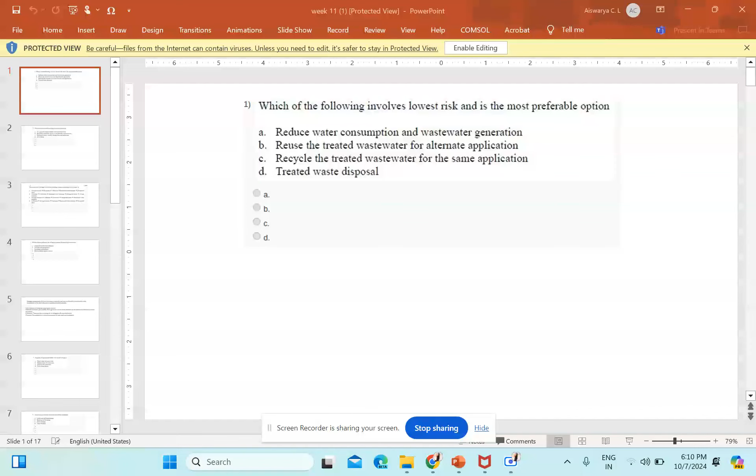Okay, we'll start this week, week 11. So these are mostly theoretical questions.

First question: which of the following involves lowest risk and is most preferable option? Four options are given: reduce water consumption and wastewater generation, reuse the treated wastewater for alternate application, recycle the treated wastewater for the same application, or treated waste disposal. So which involves lowest risk and is the most preferable option?

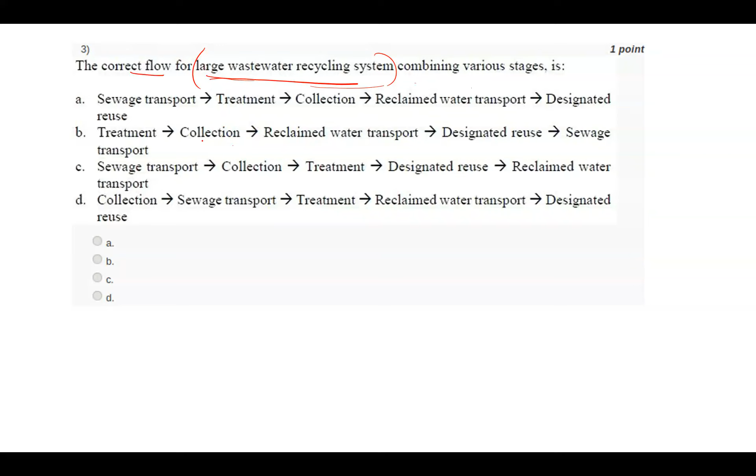Then, the correct flow for a large wastewater recycling system combining various stages - you should arrange: sewage transport, treatment, collection, reclaimed water transport, designated reuse. These are all there, then you have to arrange it according to the flow, from initial to final.

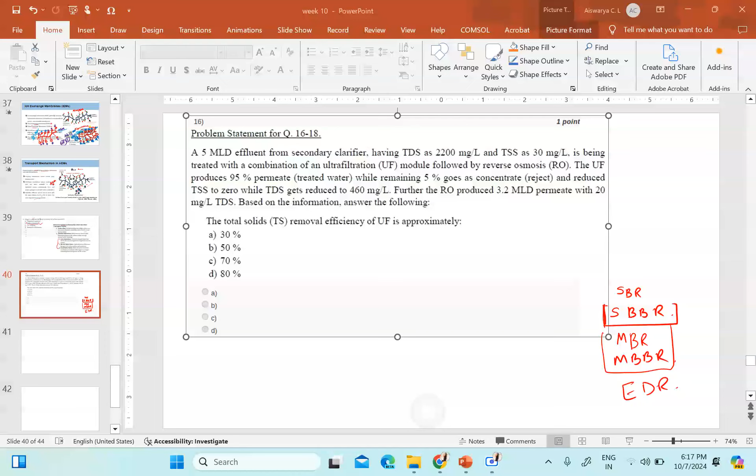So first, collection - you have to collect the wastewater from different sectors where the generation of wastewater is occurring. Then the sewage is transported to the treatment plant where it is treated. Then the treatment is happening. Then the reclaimed treated water is again transported to the designated reuse. Okay, this is the right answer - D is the right answer.

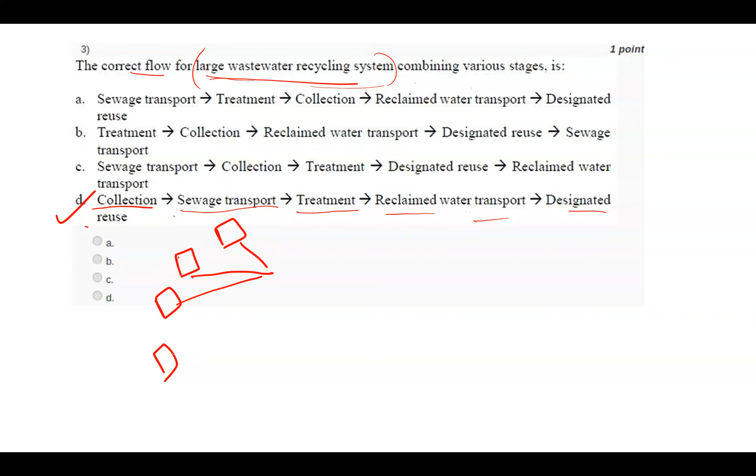First collection - that wastewater is generated even from home. If we say this is home, then we collect it, then it is transported to a treatment facility. Then the treatment facility processes it, and the treated water is sent back again. Then also the concentrated one will be there - if it's not zero liquid discharge, there should be a quantity of concentrated brine.

So anyone has comment on what is ZLD, NZLD? This is near zero liquid discharge, and this is zero liquid discharge. In zero liquid discharge, we have a waste stream, and we completely separate water and solids. This is pure water and this is solid.

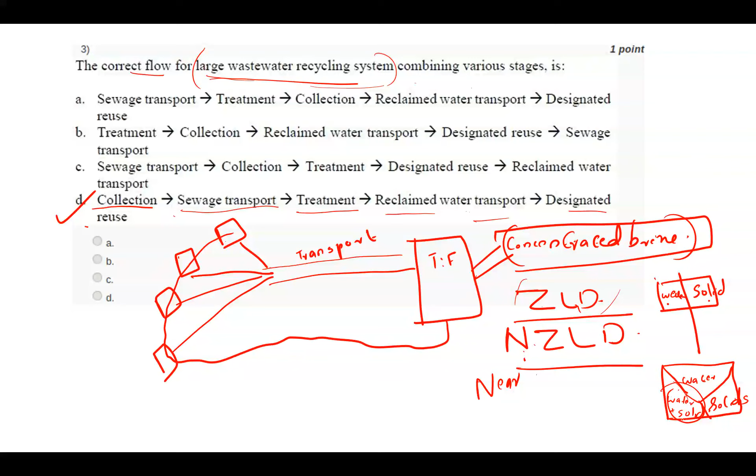So in near zero liquid discharge, what happens? We may produce three streams: water, then solids, some minerals that we have separated. Then we also have a stream, some minimal stream where water plus solids will be present, and this quantity will be minimum. We have approached zero liquid discharge, but still there is some quantity of concentrated brine produced. That is near zero liquid discharge.

Next question. Which of these pollutants are of major concerns for recycling wastewater? When we recycle wastewater, which one of the pollutants is a major concern? A. Suspended solids. B. Nitrogen and phosphorus. C. Emerging contaminants. D. Biodegradable organic matters.

Any answer? Any idea? Which is the major concern when we consider all these four options? No ideas? Which one?

Yes, right, option C is the right answer. Emerging contaminants. Why is this a major concern? Emerging contaminants are chemicals or materials that may be a threat to human health or environment, for which there are no published standards.

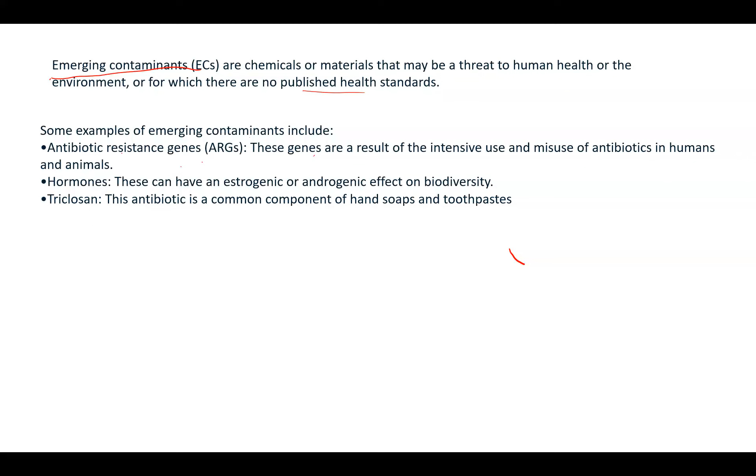Next question. Irrigation of agricultural fields with treated sewage: is it direct use of wastewater, indirect use of wastewater, disposal of wastewater, or none of the above?

Yes, A only, I said like use, I guess it's reuse. It's the right answer, direct reuse of wastewater. So what we are doing is wastewater is collected and treated, and if the chemical content inside is fine with the agricultural field, for different crops different standards apply, for some crops salinity is fine, for some the salinity should be very low for them to grow. According to those standards, if our treated wastewater meets them, then we can use it for irrigation. This is called direct reuse of wastewater, after treating the sewage.

Disposal is not right, because disposing means we are not treating, just putting it. Indirect reuse is also not correct, since we are directly treating and putting the same water for irrigation.

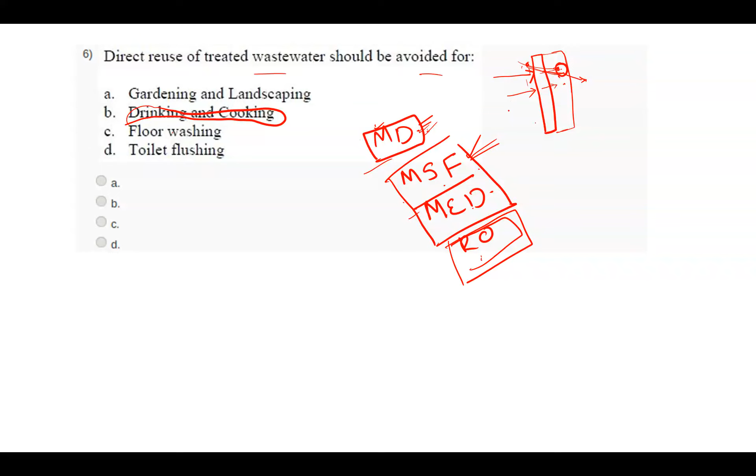So this treated wastewater we can just use in, I think, some schools also have started - not very dirty water, but some minimally treated water they are using for toilet flushing.

And even floor washing also, we should have certain water which is safe for even floor washing. Otherwise that will also get damaged, or if some bacteria and viruses are there, then dangerous bacteria, if used for floor washing, and if we have small kids, that will come on them and can be a problem. So it's complicated, but it should not be taken for drinking or cooking directly.

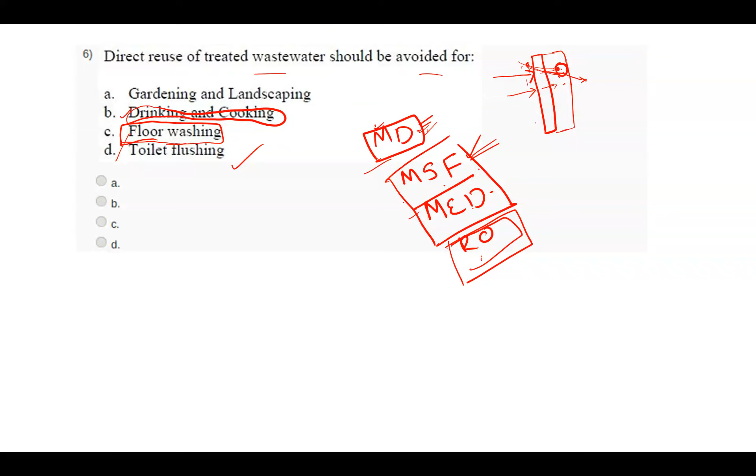The disadvantage of separate grey water recycling over sewage recycling is: treating grey water is more difficult than treating mixed sewage. A separate grey water collection system would be required for grey water recycling. Treated grey water has lesser social acceptability than treated sewage, all of the above.

Disadvantage of separate grey water recycling over sewage recycling. Any idea?

So the answer is B - a separate grey water collection system would be required for grey water recycling. We need a separate collection system.

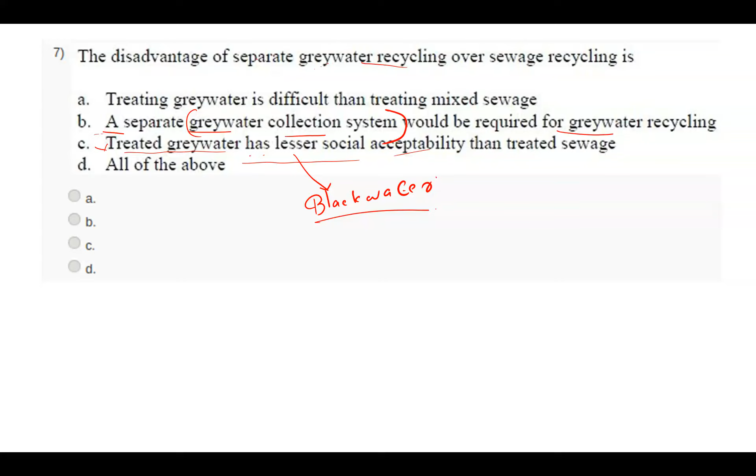And okay, then B - a separate grey water system would be required for grey water recycling - that's why that is the disadvantage of separate grey water recycling over sewage recycling.

The most preferable option for industrial effluent management is: treating and recycling it for industrial processes or other uses within industry; treating and discharging it in a nearby river or lake; or groundwater recharge with treated effluent using evaporators for complete evaporation of the effluent.

Most preferable option for industrial effluent - yes, right, A is the answer: treating and recycling it for industrial processes or other uses within industry.

So it will be easy - meaning, after treating, if some content is still there, if it's okay for the industrial process, that is very easy. We don't need any next step of treatment. So that first option is the right one.

The second option, treating and discharging it in the nearby river or lake, is not a good option. Even the treated effluent should have some chemicals that will change the chemical composition of the river or lake. Groundwater recharge is also not a good option - it will contaminate the groundwater. Also, using evaporators for complete evaporation of the effluent - do you feel that this is also a good option?

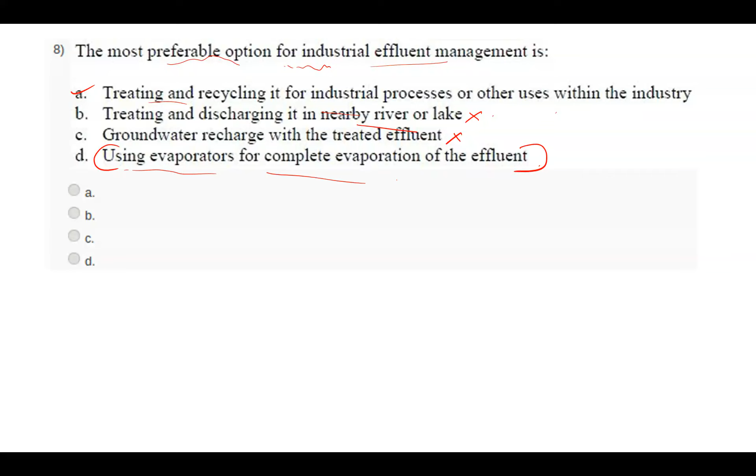So, evaporation ponds. What are they doing? The wastewater generated in the plant, after treating, we make a pond-like manual structure and fill it. Then in daytime, from solar radiation, heat energy comes, and due to this thermal energy from the sun, it will start evaporating. After the evaporation, water will go, and the remaining minerals will stay at the bottom.

So the disadvantages: a lot of area is consumed, and it is also a bulk heating process, meaning we need a lot of energy. That means it depends on the day also. If it's a rainy day or a very cloudy day, it will affect the process of these evaporation ponds. So this is bulk heating.

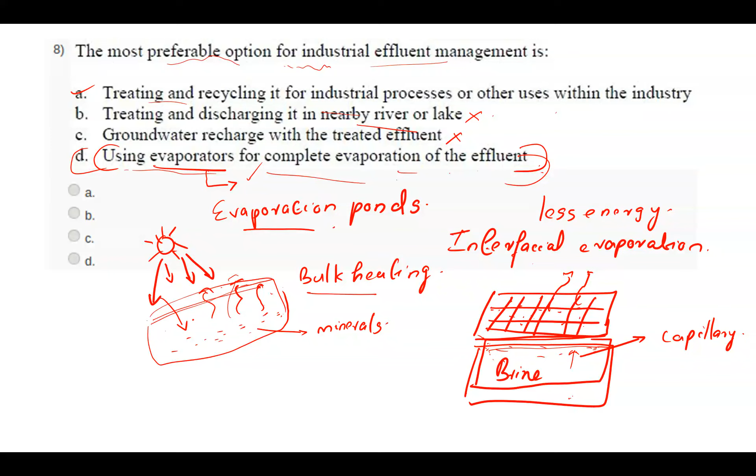Next is: groundwater recharge with treated wastewater is an example of A, wasting of treated water; B, indirect reuse of reclaimed water; C, direct reuse of reclaimed water; D, none of the above. Which one?

Any idea? Sorry. C. No, the answer was B, indirect reuse of reclaimed water. Why is it so?

So, for what type of wastewater, give me some example. After treating this water, they are injecting it to the ground level. I think this is the oil industry, heard of deep well injection. In the oil industry, the water taken out, after treatment, even the concentrated water, is again injected back into the ground. This solution is not only water, it has oil content, or petroleum type oils, it's not clean water, it's oil.

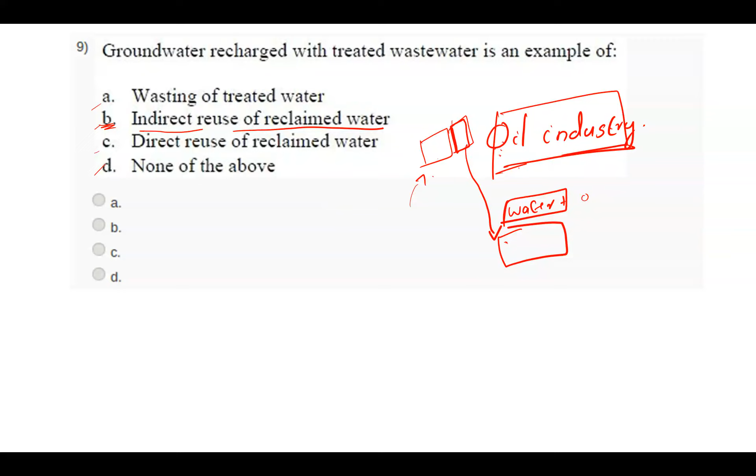Some other example you can give, any other wastewater industry which recharges groundwater? Okay, which industry? I didn't hear, sorry. Yeah, you're saying about the factories? Okay, yeah, okay.

So I have just given reclaimed water, which we have already studied: treated and purified for reuse. Here I have given direct use and indirect use. Direct use means immediate application for specific purposes. Indirect use means further treatment or mingling with other water sources is needed. Direct use includes irrigation, industrial processes, toilet flushing, and fire protection systems. Indirect use means groundwater recharge, surface water augmentation, and drinking water supply after extensive treatment.

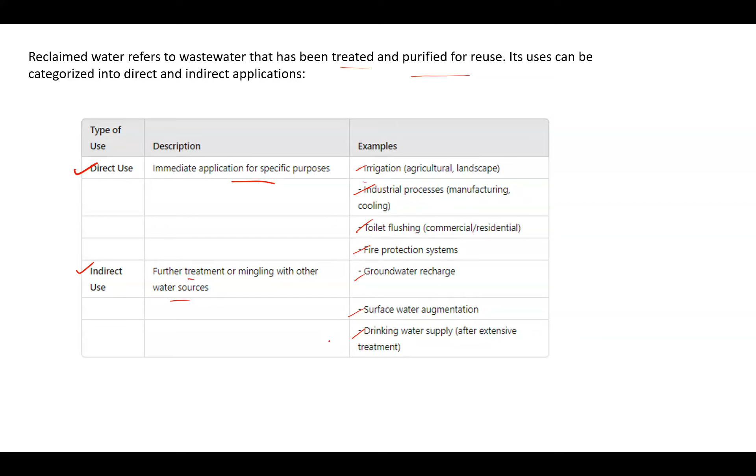Now, the implementation component of WHO guidelines for wastewater reuse: A, establishing monitoring and assessment mechanisms; B, defining institutional responsibilities and accountability; C, independent surveillance of the system; D, all of the above. Implementation component of WHO guidelines for wastewater reuse.

Option is D, all of these: establishing monitoring and assessment mechanisms, defining institutional responsibilities and accountability, and independent surveillance of the system.

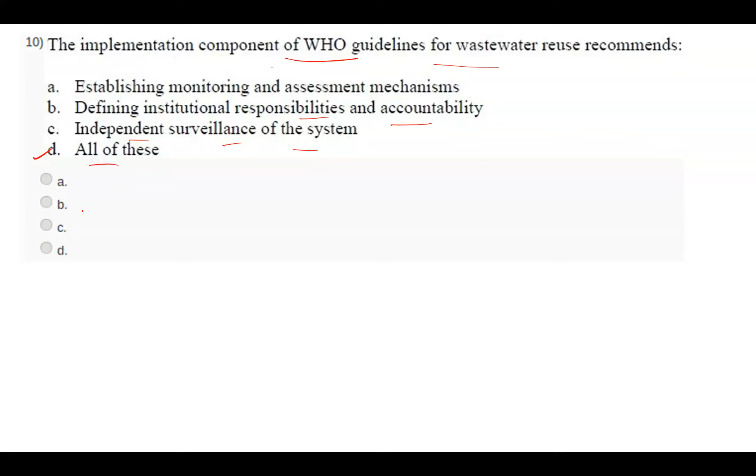In many developed countries, there are strict guidelines, even WHO guidelines followed by government guidelines, on how factories must treat wastewater before disposal. Wastewater produced by a factory has to be treated, and it should not be directly disposed into any street, nearby water body, or soil. Strict laws exist there, but in India these rules are very loose. Many factories directly discard waste into the soil or water sources. If a river flows behind a factory, they just put a pipe into it and let the waste flow in. So in India, these rules are not that strict.

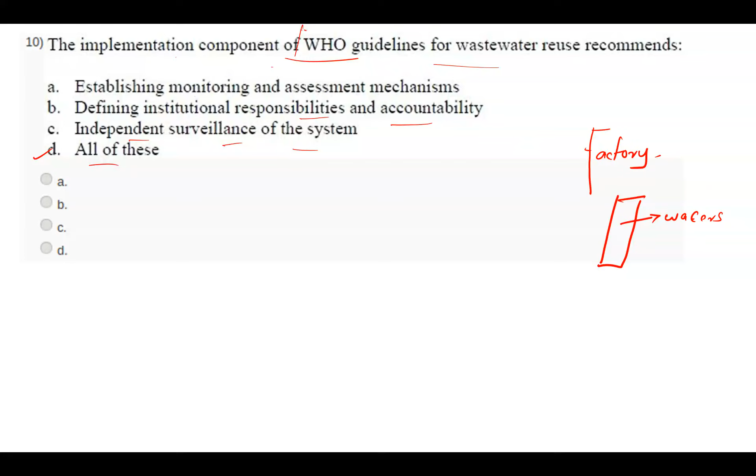In all developed nations, there is cleanliness maintained. Even a very big factory producing wastewater has a proper system to treat it before discharge.

In Rajasthan, there are RO treatment plants. Rajasthan is a landlocked region, and the groundwater there is saline. Mainly in Rajasthan, they are treating this brackish saline water.

Brackish water is less saline than sea water, which has approximately 3.5 percent salinity, but brackish water has less than that. What they do is dig an underground pipe, take out the saline water from underground, and then treat it, for example using RO technology. After RO treatment, there is purified water, and the remaining is a concentrated stream.

In Rajasthan, since it's a landlocked region, they can't easily link this concentrated stream to the sea. So in many regions, they are just directly putting it on the land, which is an important issue there. Not only in Rajasthan, but in other parts of India too, these treatment plants are not strictly following the rules.

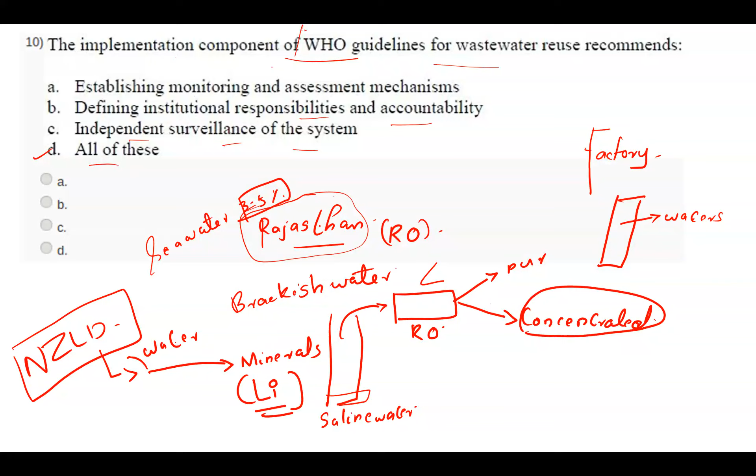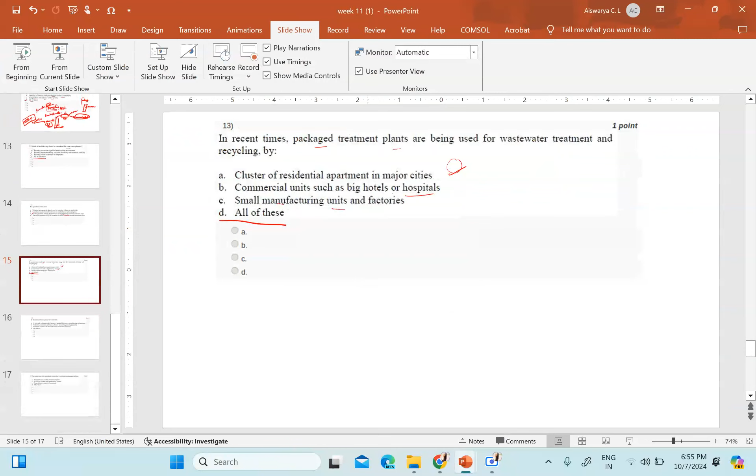It is like, not all the parts are portable, but when we compare it to the big treatment plants, it is portable, we can say. Then the people who install, they can come with the decentralized system and install it in a smaller area that has a small footprint, spatial footprint. And that doesn't need much civil work also, like there is no need of several workers in a small scale. Or do you need some photos? Okay, I will give some photos if I can find them. Next section, I will collect some photos and I will just give them.

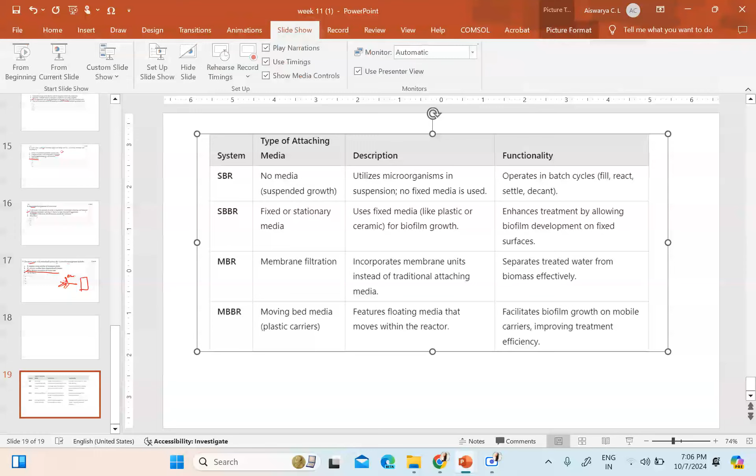Then one more, Sankamitra, you were asking this now. This one about the attached media movement, right? In the previous class, attached media movement, that was the question, right? I hope.

So here in SBR, the difference is the biofilm coming, right? Here also, so when you see here, you know that in the previous class there was some growth mechanism, suspended and something like that, I will just show you to remember. I hope you remember, there was some picture also I have shown.

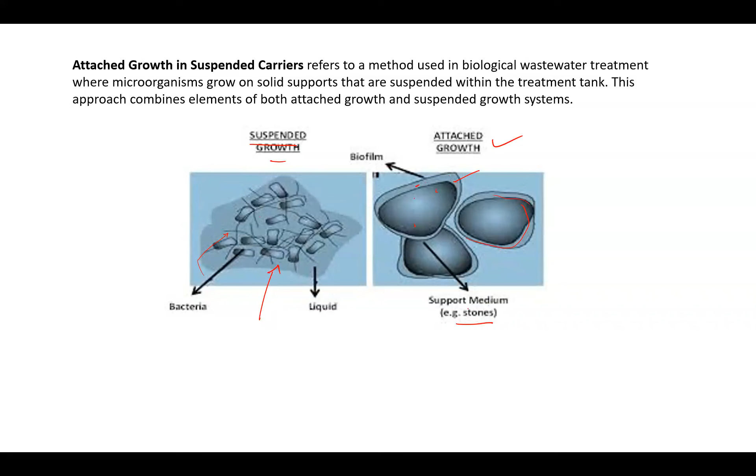Here when you see the SBR, like we have discussed, no media, that means it's a suspended growth. The microbes are in the wastewater in suspension form, and we are providing the food in the wastewater itself, it is also in floating form. Floating in the sense it's in movement, it's in the suspended form.

No fixed media is used here. In SBBR, fixed or stationary media is used, it is not moving, it's a fixed media. That media can be plastic, ceramic, or stones, these all things can be used.

In MBR, it's a membrane filtration, and this is fixed. In MBBR, moving bed media, like plastic carriers, they are using, it is moving. Any more confusion in this?

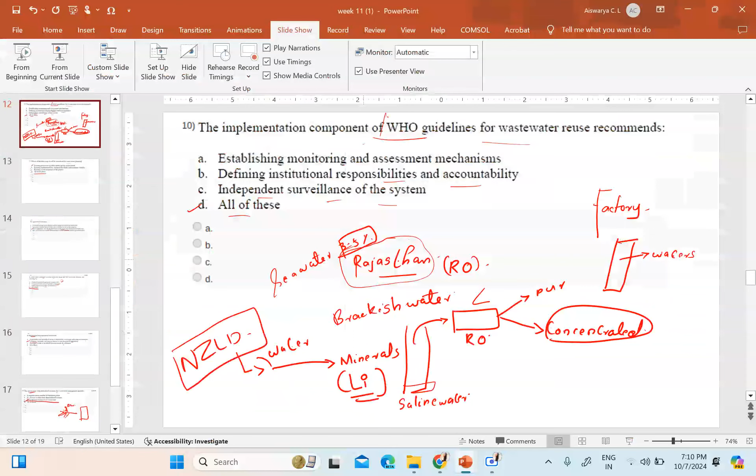Okay, okay, yes, yes, uh huh. Yes, that one doubt was there. Yes, I think it was. Yes, I forgot about that. Okay, I will, I think there was some density variation. Yes.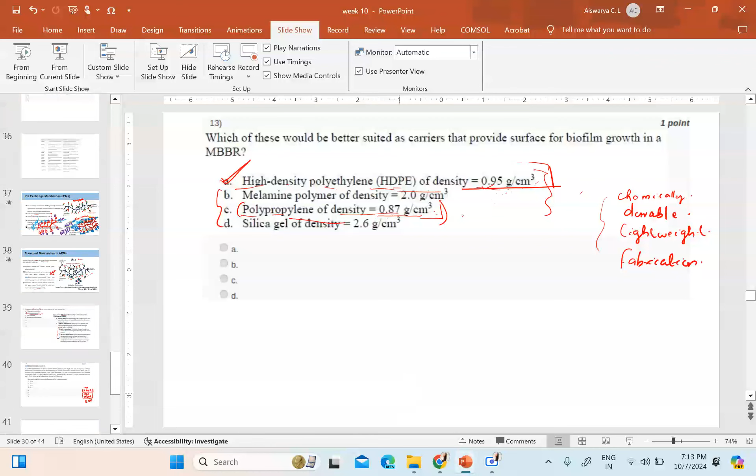I think this first part that day was also done, but for the continuation we'll start from the beginning, since this is the problem statement and we have to solve three questions.

Question: a 5 MLD effluent from secondary clarifier having TDS as 2200 milligram per liter and TSS as 30 milligram per liter is being treated with a combination of ultrafiltration module followed by reverse osmosis. The UF produces 95 percentage of permeate, while remaining 5 percentage goes as concentrate reject and reduces TSS to 0, while TDS gets reduced to 460 milligram per liter. Further, the RO produces 3.2 million liter per day permeate with 20 milligram per liter TDS. Based on the information, answer the following.

The total solid removal efficiency of UF - do you remember how we calculate this? First of all, let me just draw a diagram.

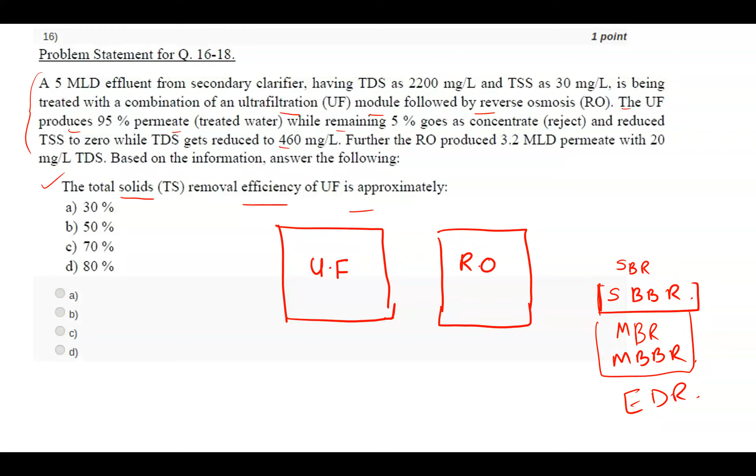So this is the 5 million liter per day effluent from secondary clarifier. First we have the UF module, followed by RO. The initial influent given to the ultrafiltration is 5 MLD, having TDS 2200 milligram per liter and TSS 30 milligram per liter, and is treated with the combination of ultrafiltration followed by reverse osmosis.

After that, TSS becomes 0, while TDS becomes 460 milligram per liter. Further, RO produces 3.2 million liter per day permeate with TDS of 20 milligram per liter.

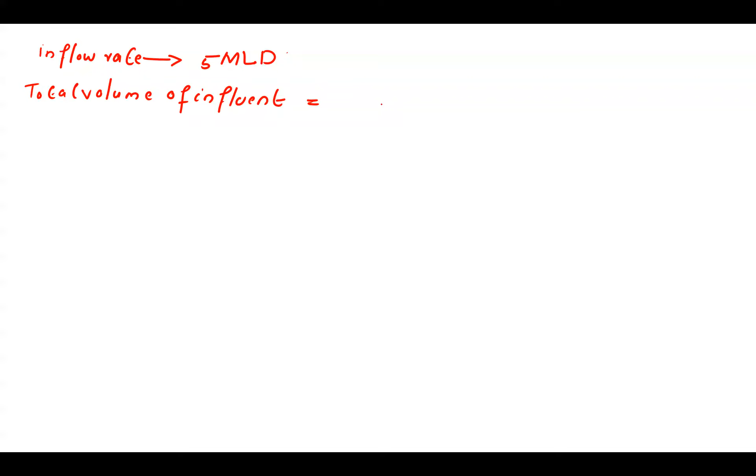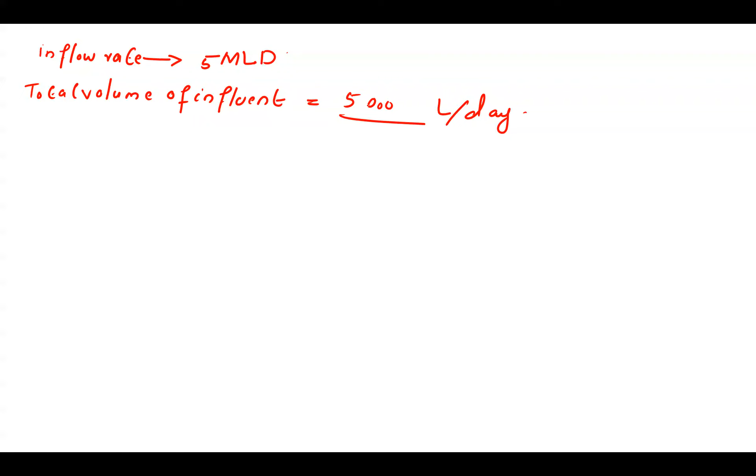From this we can calculate the volume of the inflow rate, or total volume of influent. How do you convert this into liter per day? Million means 10 to the power 6, right? So we can write it as liter per day.

Then total TDS in the influent equals this volume in liter per day into 2200 milligram per liter. Now how much does it come to in kg per day? I think it will become 11,000 kg per day. Is that right?

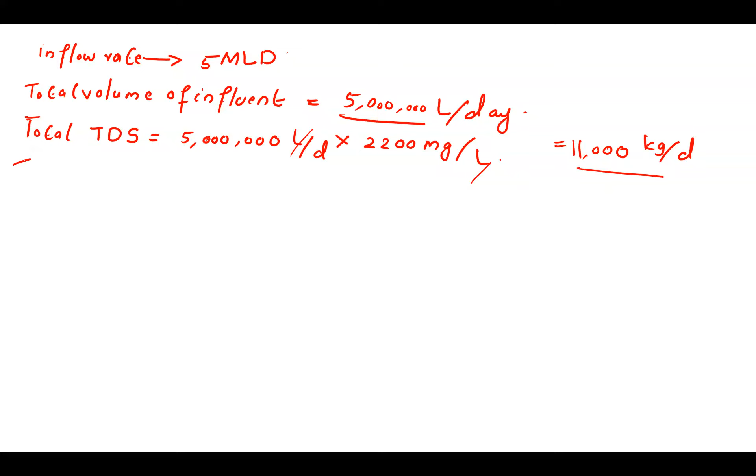Then total TSS equals this same volume in liter per day into TSS, which is 30 milligram per liter. The liter units get cancelled, and then it is 150 kg per day. I hope till now it's clear.

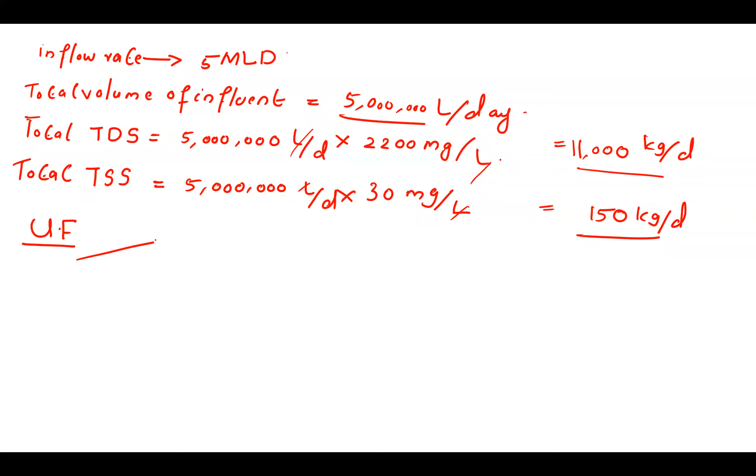So this is the inflow. Now consider after the treatment in UF, it has a permeate and a concentrate. So now in the permeate, let's see the TDS in the UF permeate.

So the TDS in the permeate is given as 460. How do you calculate the TDS in the permeate of the UF? There is one more point given - this permeate is 95 percentage, and the concentrate is 5 percentage, right? So 95 percentage of this total 5 into 10 to the power 6 is how much?

This is the total inflow. Then you have to take 95 percentage of this 5 into 10 to the power 6, that is 5 into 10 to the power 6 into 0.95. I think that will come to 4,750,000 liter per day, into 460 milligram per liter.

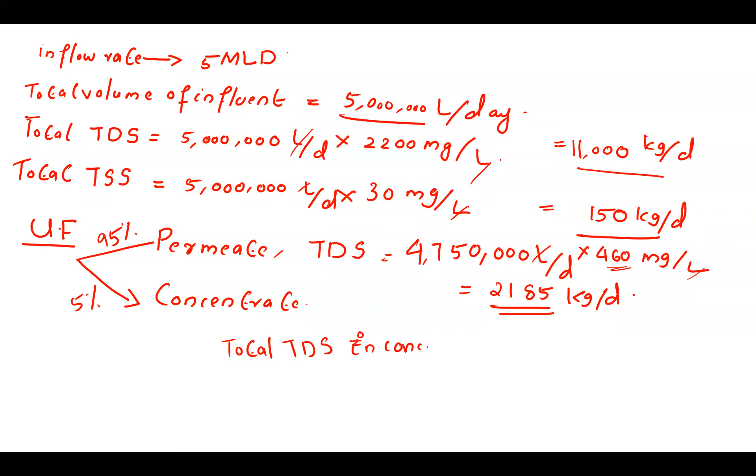okay, total TDS in the concentrate, let's say concentrate, which will be equal to total TDS in the permeate, minus total, this is total TDS minus total TDS in the permeate. So the total TDS in the concentrate, which is here, because if you add the concentrate in the TDS, concentrate in the permeate plus concentrate, you get the total TDS. So to calculate the TDS in the concentrate, you can just minus from the total TDS.

So the total TDS value, what is the total TDS value? This one, 11,000 minus total TDS in the permeate. Permeate is here, 2185, which is equal to 8815 kg per day. Is it clear till now?

Just please refer, I'll quickly show the question. So you see the screen here. The UF is here, RO is here. The first initial inflow is 5 million liter per day, and TDS in that particular wastewater is 2200 milligram per liter, and TSS is 30 milligram per liter.

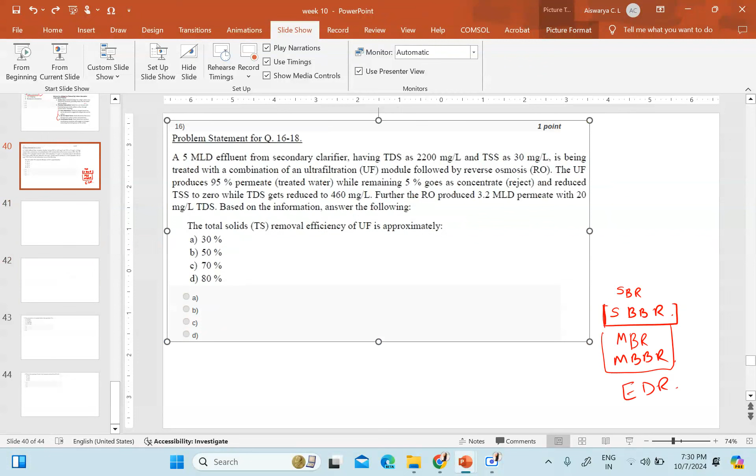okay sorry, I have deleted. What is it? Okay, did you write till that? I hope that guys have written till that. Just see, TSS in the UF permeate, permeate it is 0. And then TSS in the, this is in the permeate.

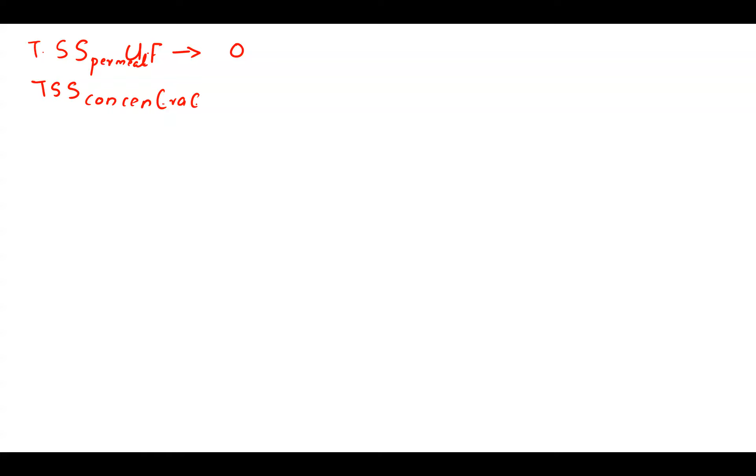And now TSS in the concentrate. TSS in the concentrate, it is given 150 kg per day. TDS, this is the TSS in the concentrate, that is 150 kg per day.

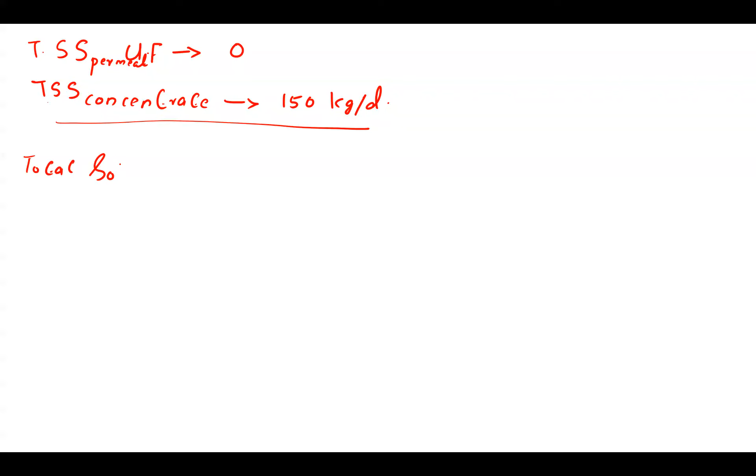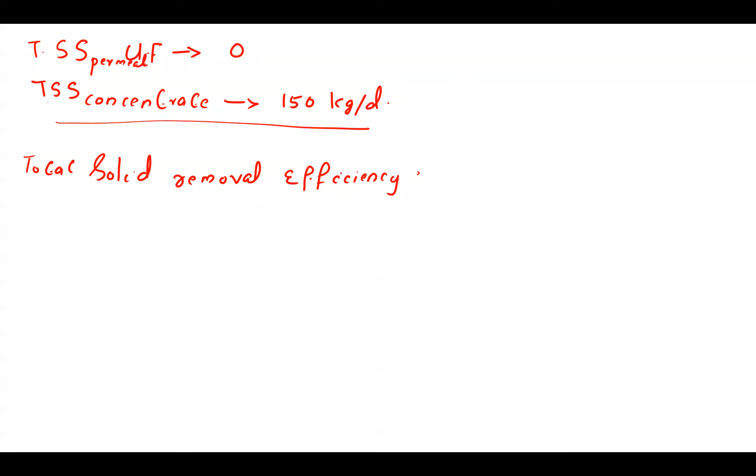Now total solid removal efficiency of UF. So first we have to calculate total solid removal efficiency of UF. So first we know that A, we can write total solid in the influent.

What is the total solid in the influent? How do you calculate that? Total TDS plus TSS, which is equal to, what is the TDS in the influent? Okay, have you guys noted down? No. Okay.

TDS value is 11,000 kg per day plus TSS. TSS is 150 kg per day. And then total will be 11,150 kg per day. That is the total solid in the influent.

The next point we should know total solids in the UF permeate. This is also like total TDS in the permeate plus TSS in the permeate. So TDS in the permeate, okay, TDS in the permeate which we have calculated is

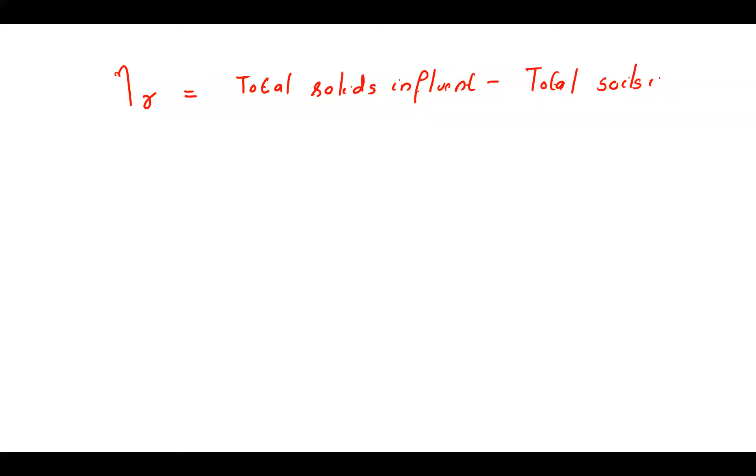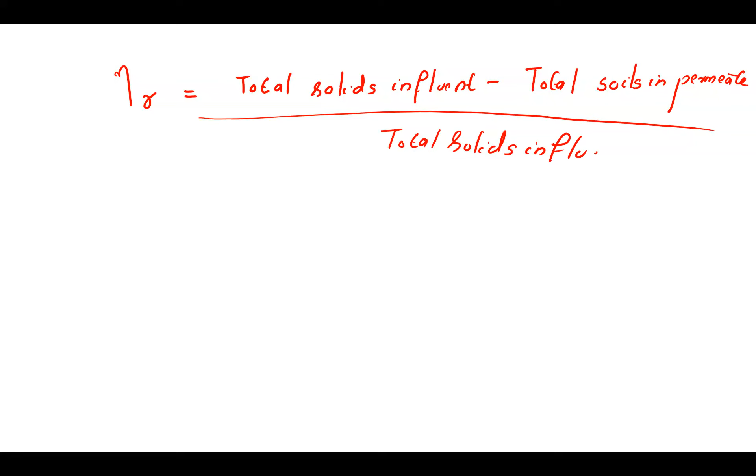From this, can anyone say how do you calculate the removal efficiency? Removal efficiency is equal to total solids in the influent minus total solids in permeate divided by total solids in the influent. That means total solids in the influent that we calculated.

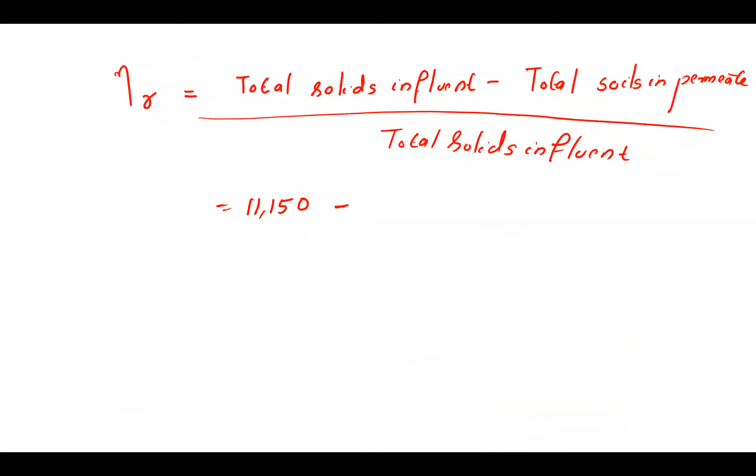That is 11,150 minus total solids in the permeate, 2185. Total solids in the influent 11,150. Then what you have to do for the 100? That means it will reach what value? It will reach 80.5 percentage.

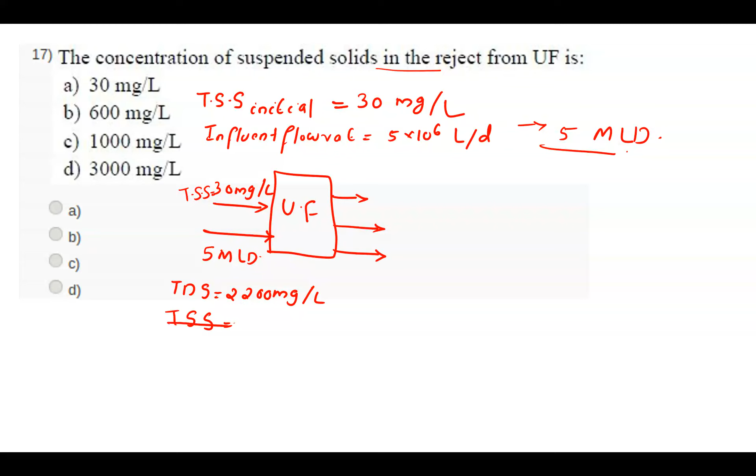Now you can calculate what in the previous question we calculated, the total TSS. I'm writing: total TSS in the influent equals volume into TSS concentration.

We have 5 into 10 to the power 6 liter per day into TSS in the initial stream, that is 30 milligram per liter. So that will come to, we already have value, 150 kg per day.

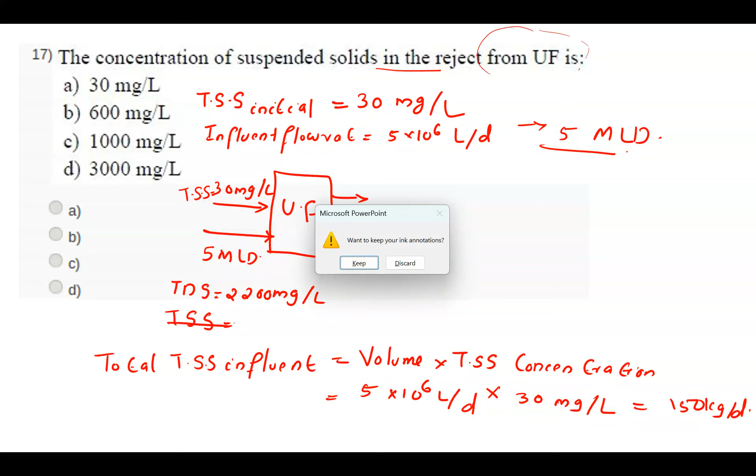Now the concentrate TSS in reject from UF, that we have to calculate, in milligram per liter. Now, total volume of the concentrate, volume of concentrate from UF. I think we have calculated volume of concentrate.

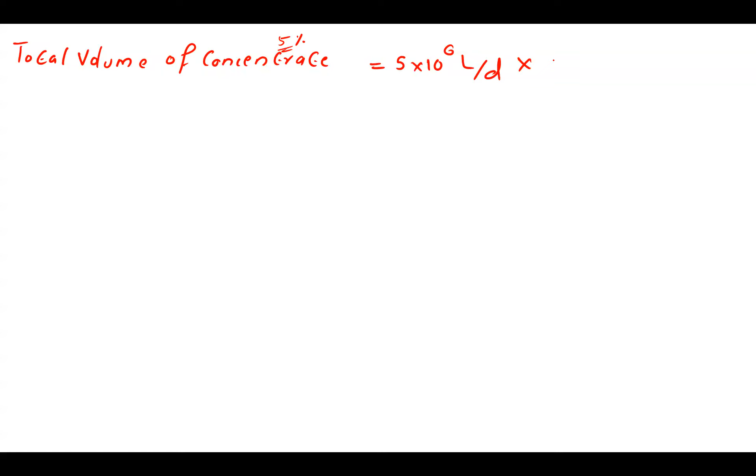Concentrate is 5 percentage, which is given in the question itself. So the concentrate volume we have calculated in the previous question. It is 5 percentage, that means from 5 into 10 to the power 6 liter per day into 0.05, that is 250,000 liter per day.

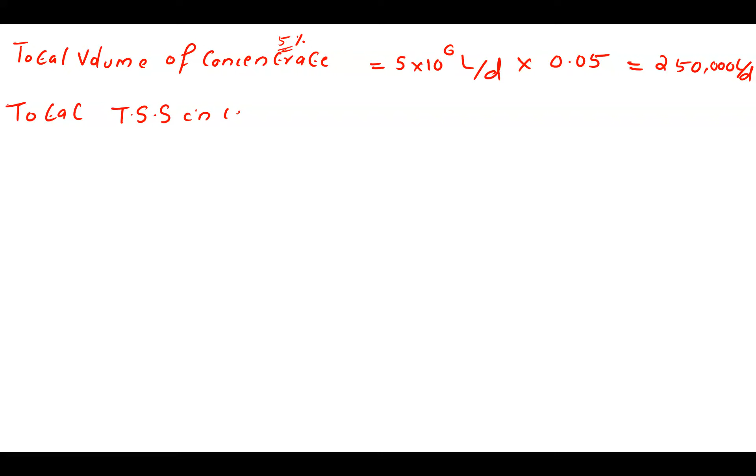So then total TSS in the concentrate, that is given in the question only. Right? Total TSS for the permeate is becoming 0, but we have calculated it in the second part, did anyone write it? The TSS concentration in the reject concentrate.

Yes, TSS in the UF concentrate is 150 kg per day. Okay, then how do you calculate the concentration of TSS in this suspended one? How do you calculate the concentration?

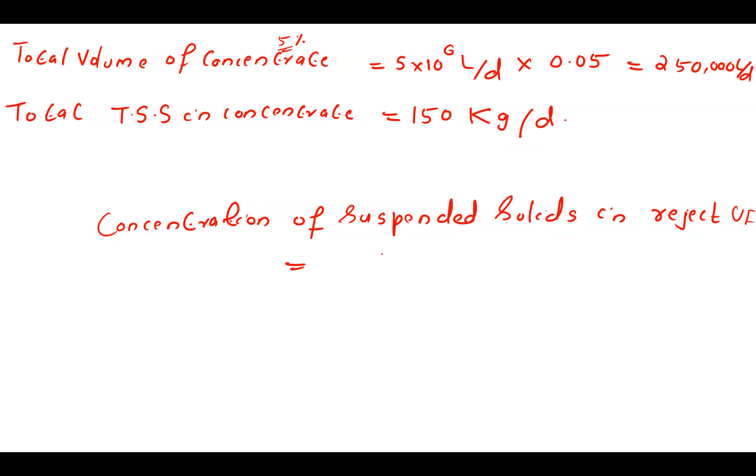Here you can calculate the concentration of suspended solids in reject from UF, that is from UF, is equal to total TSS in concentrate divided by volume of the concentrate.

So total TSS in the concentrate is 150 kg per day. Volume of the concentrate will come to 250,000 liter per day. So then this day and day get cancelled. Then remaining, this kg you can convert into milligram, so when converting into milligram it will be into 10 to the power 3 milligram.

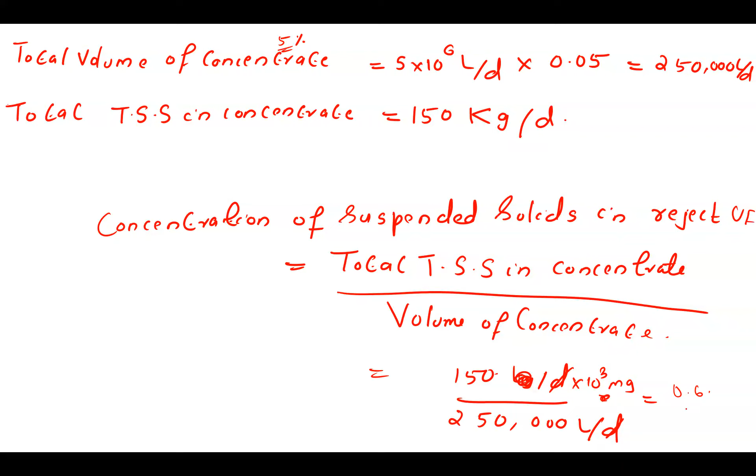That will be 150 into 10 to the power 3 divided by 250,000. How much is it coming? 0.6 is coming. I think there is some mistake because the answer here is B, 600.

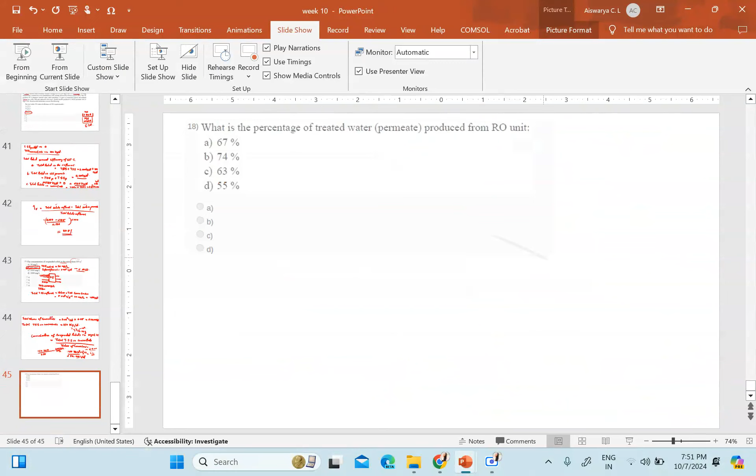Okay, so the next question: what is the percentage of the treated water produced from the RO unit? That means what is the percentage of treated water, after treatment. How much percentage, what like the percentage of treated water produced from the RO unit after UF? There is a RO unit, how much treated water? That means permeate water is generated in the RO.

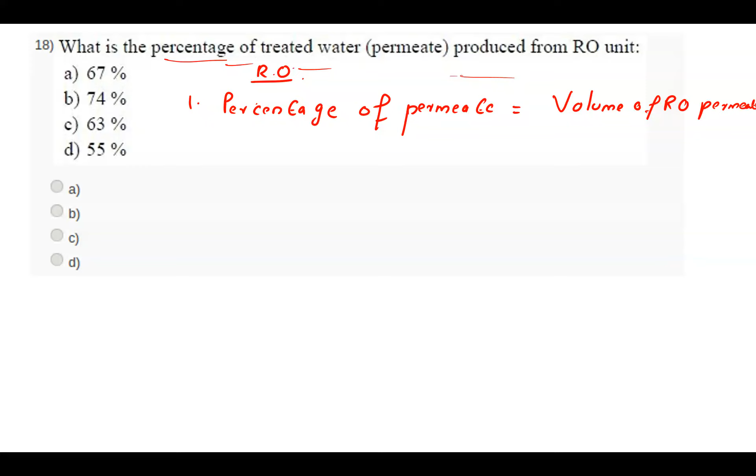So now you know the percentage. RO, let's concentrate on RO. So first is percentage of permeate, everything is in the RO unit, equal to volume of RO permeate divided by volume of UF permeate. This particular quantity should be multiplied with 100, percentage of permeate. So here percentage.

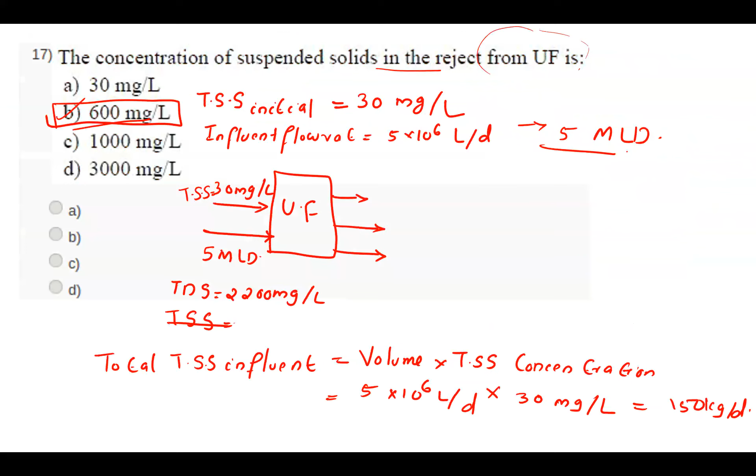So here when we put the values, volume of RO permeate just given, see, 3.2 MLD. Volume of UF permeate, that I think we have calculated, right? UF permeate is, see this 95 percentage.

Yes, then this is the percentage of permeate. When we compare UF and RO permeate, this is called the percentage of the permeate. So we got 67.3. So we can see from the options given, option A is closer to what we got, 67. So the answer is A. This is the percentage of treated water, that means permeate, which is produced from the RO unit.

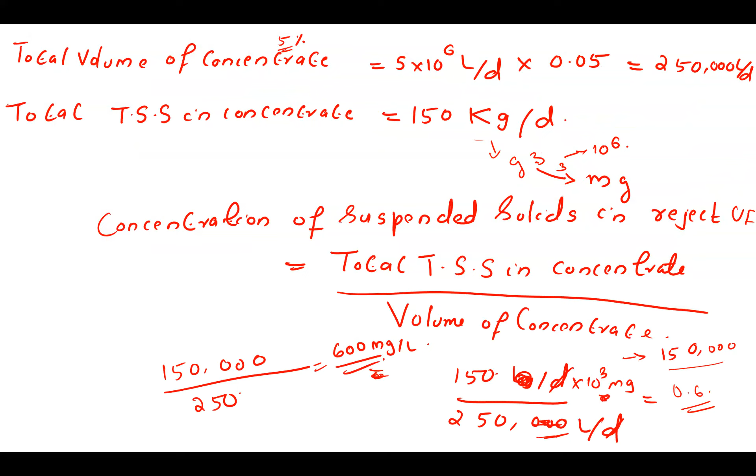What I have assumed is, see, I have assumed a zero liquid discharge system. So in the zero liquid discharge system, what is happening is after the first step, see, for example, UF is here, then the permeate is generated. This permeate can go for some other treatment, but what we have is 5 percentage concentrate we have. Again, we can process with some technology and extract maximum water. In that way I have assumed, but from the final question I think it's clear. They have given the permeate of the UF into the RO unit. That's why the inflow to the RO unit, they have considered the permeate they got from the UF system. Is it clear?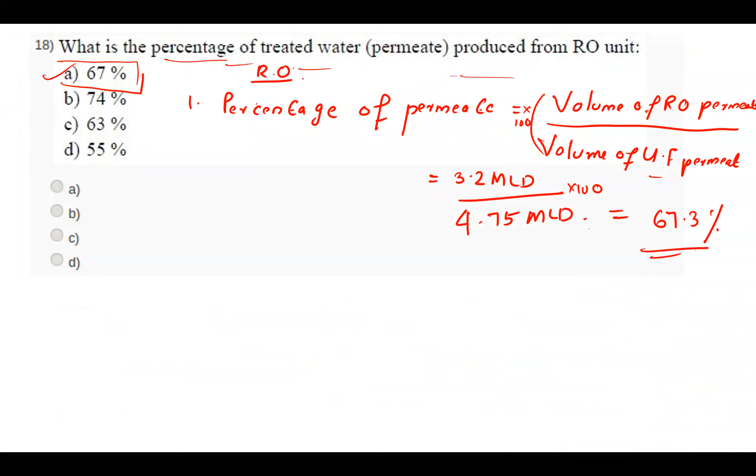Yes, sorry, then I thought like this is a zero. Yes, yes, right, right, yes, you are right.

I thought about this as zero liquid discharge. That's why I considered this 5 percentage going. From this only it is clear, 3.2. If it's 5 percentage, it is way far lower than this value. That's what you said, right? Yes, yes, because it's only 5 percentage. It is already crossing half of the MLD, 5 MLD that we got it. Yes, okay, that is the answer.

Is there anything other than this, any other points to be discussed for this question? So what they are giving is 5 MLD to the UF, and then they have 5 percentage reject they are just rejecting. Then this 95 percentage of the permeate they are giving into the RO stream, then treating this permeate, then producing permeate and concentrate. Anything else to be discussed? Is it clear, or is it confused because of this?

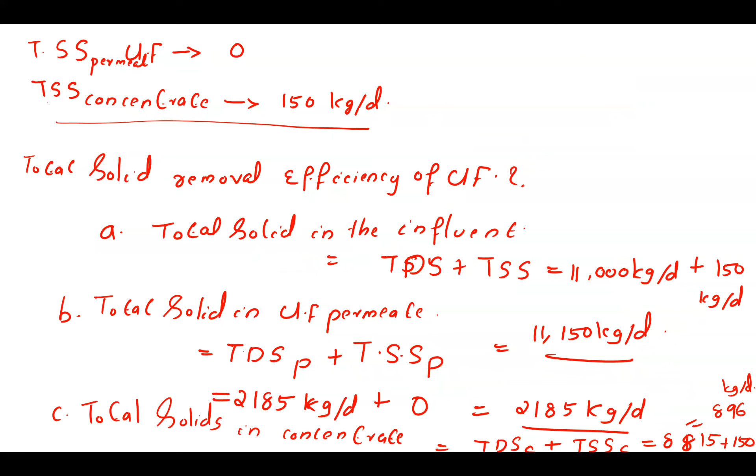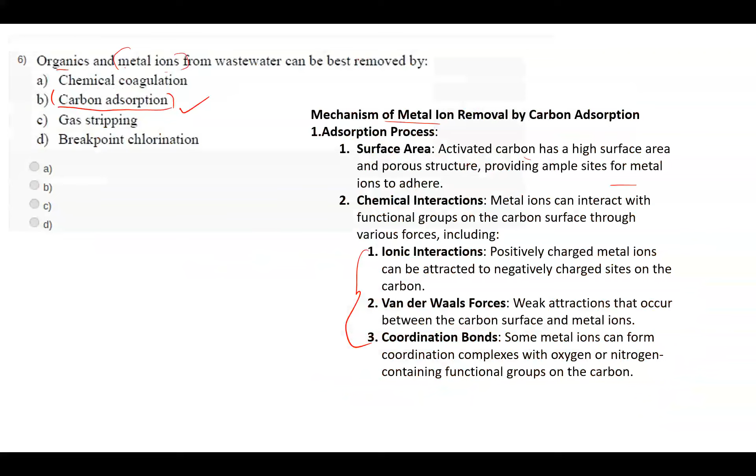Clear, okay. Any other thing, like as you said, like in MBR, this thing has to be discussed further, this point. Okay, okay, okay. Any other doubt from this class? It's only simple, okay, okay.